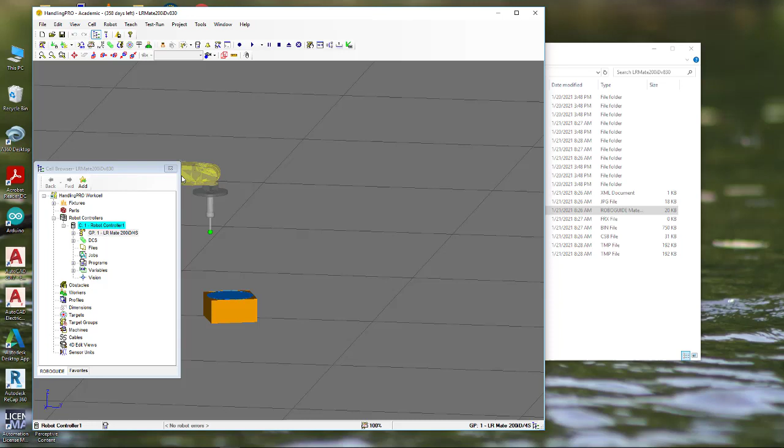You'll see a window that comes up. You can just cancel that, and I like to close this window; we're not going to need that right now. So here's your work cell. Now you also need to bring up the Teach Pendant, which if you click this, it will bring up the Teach Pendant.

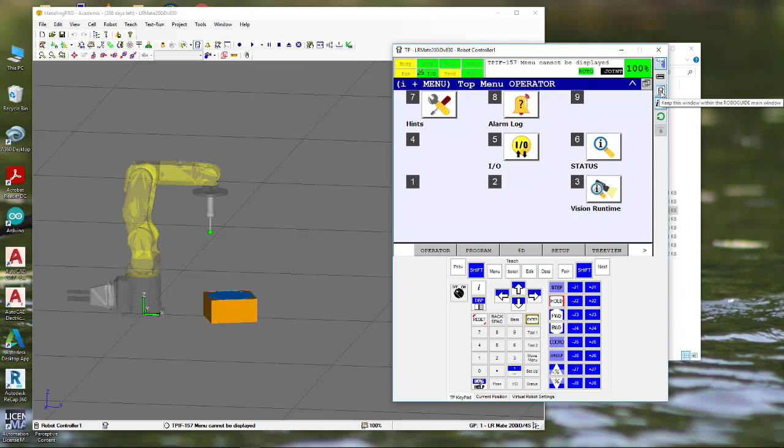Now let me show you something. If the Teach Pendant comes up looking like this, you want to click this IP button. This brings it up to look more like the actual Teach Pendant on the robot; the other one is an older version. Also, there's this other button where you can either have the Teach Pendant inside the window with the robot, if I click that, or you can click it to make it an independent window. I like it to be an independent window, but that's up to you.

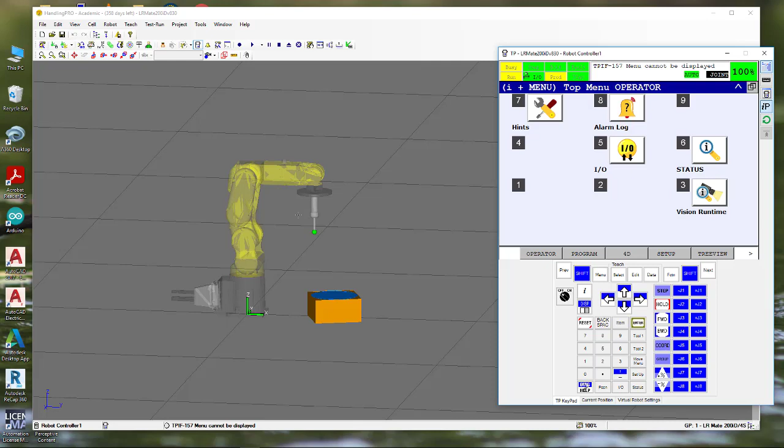Now there's some very important mouse commands that you're going to find very useful to move the work cell around and change the views. Yours may come up by default, but mine I have automatically hidden. If you lose them, you go to the View menu, go to Mouse Commands, and this gives you a list of useful mouse commands.

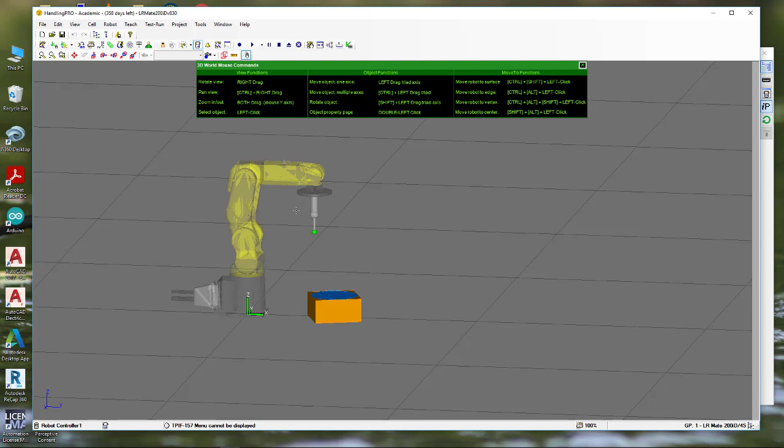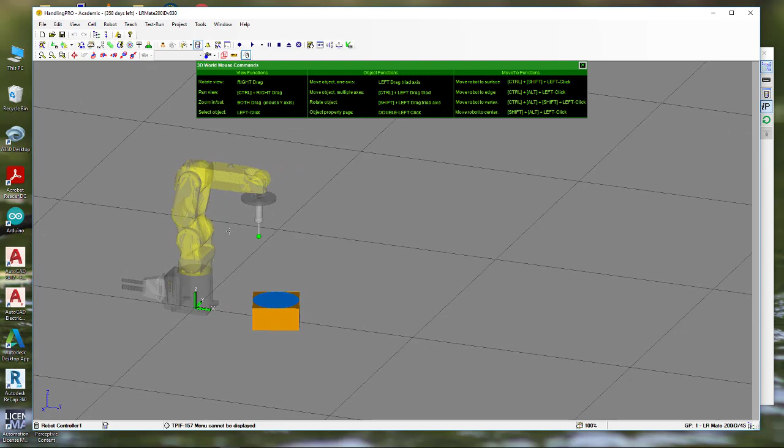So the ones that I use most often, if you have a regular mouse: a right drag will rotate the view, and you can rotate it to look at the top, the side, any view like that. Now if you want to just pan the view, you have to hold Control key and do a right drag, so that moves the view back and forth. Then to zoom in and out, use the roller if you have one on your mouse, or if not, click both left and right and drag, and the view will move in and out, zooming according to wherever you are centered in the view.

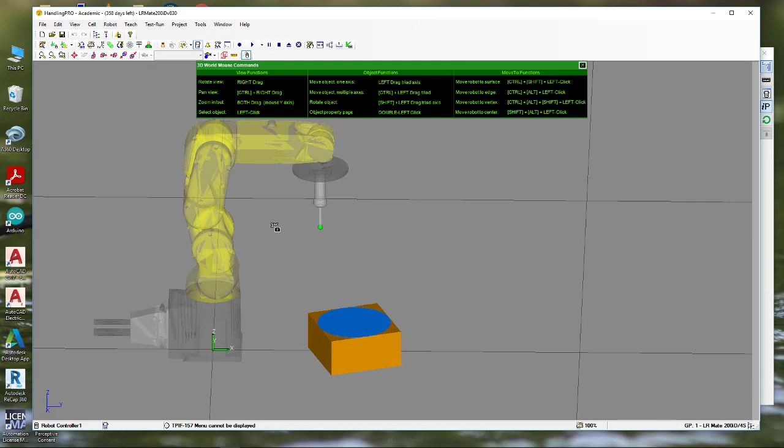So those three, being able to rotate the robot, pan the robot, and zoom in and out, those three will probably get you any kind of shifting of the view that you might need.

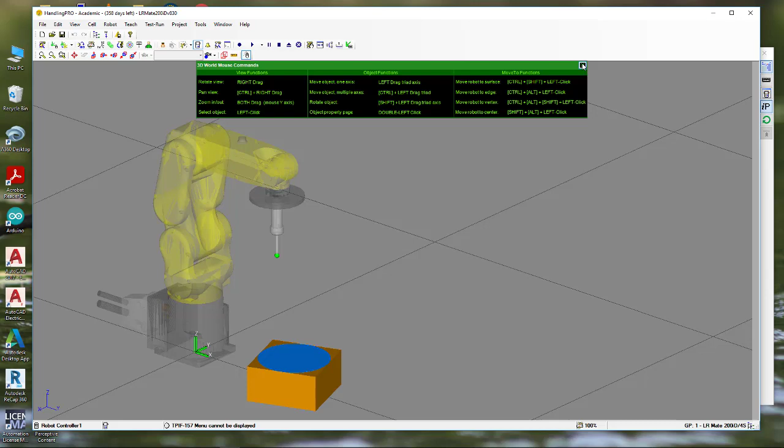There are some other mouse commands that you can check out here if you want, but I find with those three you're pretty much all set. I'm going to close that for now, and let's look at just basically moving the robot.

The first thing you have to do is turn the Teach Pendant on, and it should come up by default showing that it's in joint mode. You see it says joint up here, and the jog buttons should all be labeled J1 through J6.

There's also J7 and J8, but those don't apply because we don't have axes 7 and 8. So in the lab, what you're going to do is just try them out, see what happens when you click each of those jog buttons.

See what joint 1 does. See what joint 2 does. Just try each one of the joints, joint 3 positive and negative, joint 4. So that's what you're going to do, is try those joints out.

Now in the actual robot system, you have to hold the shift key while you're pressing the jog key. But since you only have one mouse, it automatically presses the shift when you press a jog key.

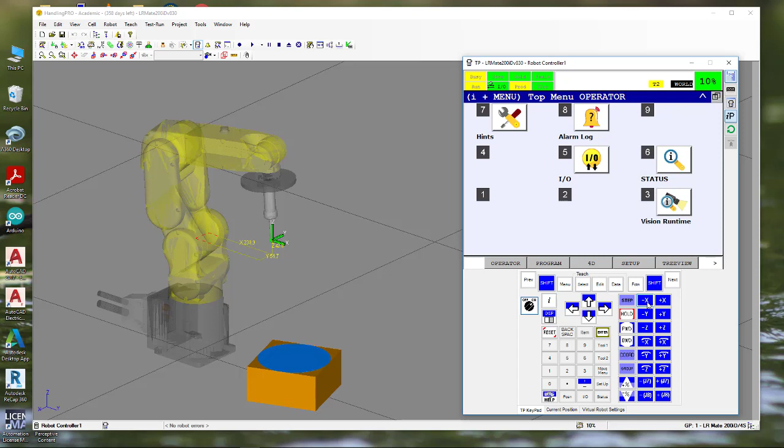The other coordinate system we're going to look at moving in is world. Joint was just moving joints individually. Now if you go down here to the coord button and keep clicking it until it says world, you notice that the buttons now say X, Y, Z, and then rotation about X, Y, and Z.

So you're going to try these as well and watch what happens, how the robot moves. Very different type of movement, and I'm not going to go over that here. That's something we're talking about in the lecture, but you're going to try each one of the movements.

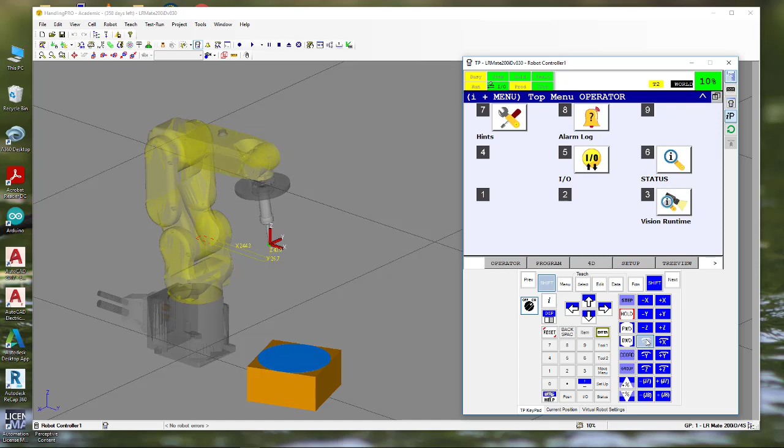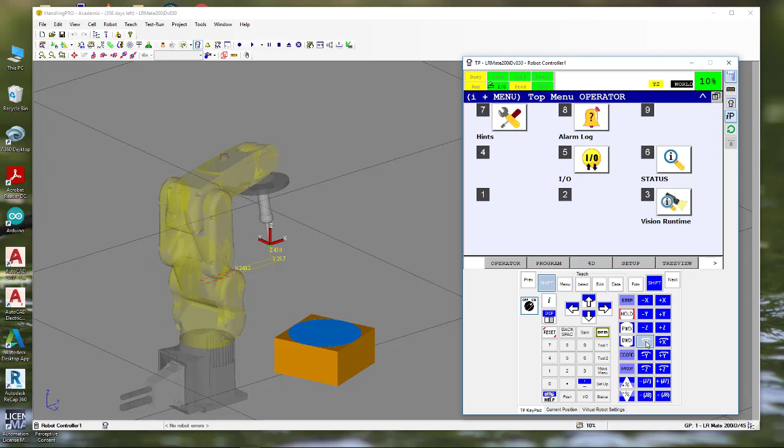Now the interesting one is the rotational movements. When you rotate around X, it's as if the axis that you're rotating around is a pin, and it's fixed, and then the robot hand is rotating around it. And if you notice, the tool center point, that dot at the end of the tool, doesn't move when you rotate about the axes.

So that's why we call X, Y, and Z the positional axes, because it sets the position of the tool center point, and then the yaw, pitch, and roll, the rotation around X, Y, and Z, are the rotational or orientation axes, which sets the orientation of the robot around X, Y, and Z.

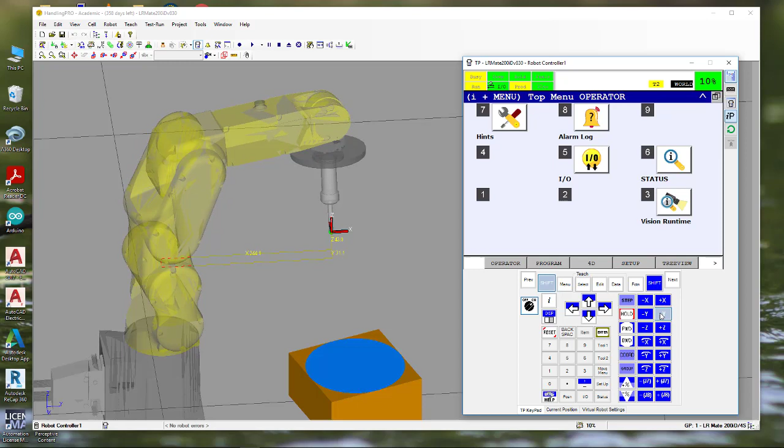Now, the one more thing you're going to do in the lab is to check the position of the robot. Let me move it out a little bit so it has a little bit of a different position, maybe over here like this. Now, to check the position of the robot, you click the position key, POSN, and what you'll notice is it comes up showing initially the joint angles of all the joints, joint 1, 2, 3, 4, 5, and 6. Those are angular values.

If you want to see the X, Y, Z coordinate values, you click the world button, and then it comes up X, Y, Z, yaw, pitch, and roll. Those X, Y, Z values are the distance in millimeters from the world origin, which is right inside the body of the robot. So we're 344 millimeters out from that point, we are 122 millimeters off to the side, and we are 43 millimeters up. And then these three, the W, P, and R, are the rotational values, the rotation around X, Y, and Z.